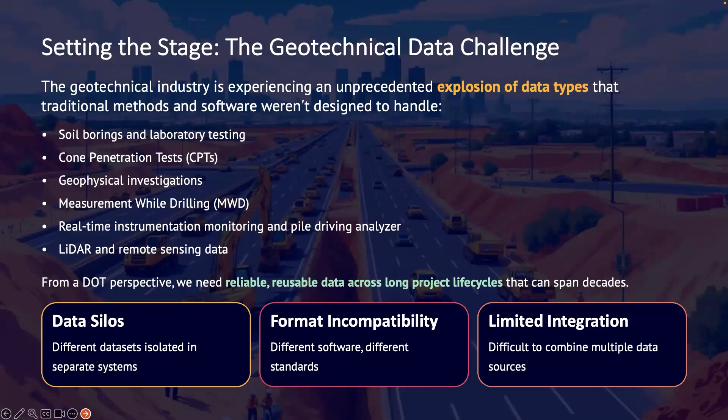As we've seen, integrating diverse geotechnical data is a major challenge for geotechnical engineers. One big reason is we've seen a rapid shift in our software landscape recently in terms of data management. For years, our industry relied on gINT as the dominant standard for geotechnical boring data management and reporting.

However, as we all know at this point, there's a planned sunsetting of the gINT software. So we've entered a transition period of uncertainty, and really a need to adapt quickly to decide where we're all going to go as geotechnical engineers.

Today we're in a multi-vendor ecosystem where several strong alternatives have emerged, each with their own unique strengths and weaknesses. Some challenges associated with this paradigm shift are: staff are going to need to retrain to use new tools, new workflows may need to be created from scratch for these new platforms, and data will be exposed to possible errors due to

increased data migration and conversion efforts to get things from an old system to a new system. Users are going to need to be sure they're adopting data management standards to make sure they don't start or bring over old bad habits, and that their data remain reliable and usable across multiple systems.

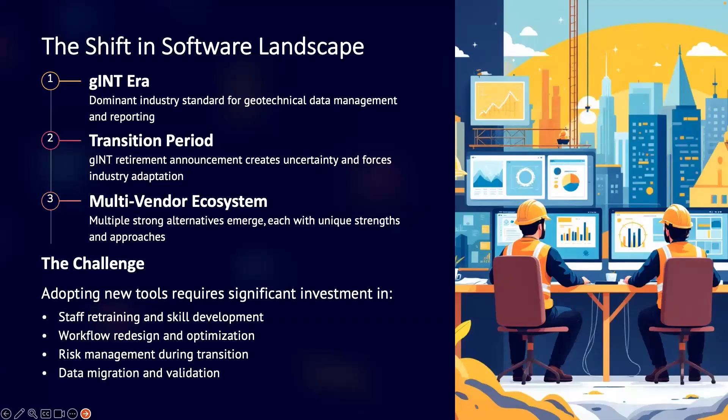As we try to navigate this shift in the data landscape, one of the risks we need to be aware of is a heavy reliance upon any single software solution. This is just my personal opinion, but we want to make sure we don't get locked onto a single vendor. One reason for this is the life cycle of our geotechnical data assets versus our software.

If you consider the life of a bridge or a pavement structure versus that of a piece of software, we can pretty quickly see that our software solutions can turn over several times over the life of a structure. Another reason is to minimize disruptions amongst our consultants.

As a state agency, if we can avoid forcing any of our consultants to use one specific piece of software, we prefer to do that. We also think it's advantageous to create modular systems where specialty vendors can create tools to access and analyze data without having to develop the data storage and data management system itself.

The bottom line here is that we want our data to be standardized so that it can outlast the software we're using. To protect our investments and ensure continuity, we need to develop strategies that keep geotechnical data accessible and resilient no matter how the technology evolves.

Ultimately, that's the backbone of what we're trying to build here, something that can consume standardized data. We're trying to standardize the data on the back end so that we can develop tools like we're going to present, to consume the data on the front end.

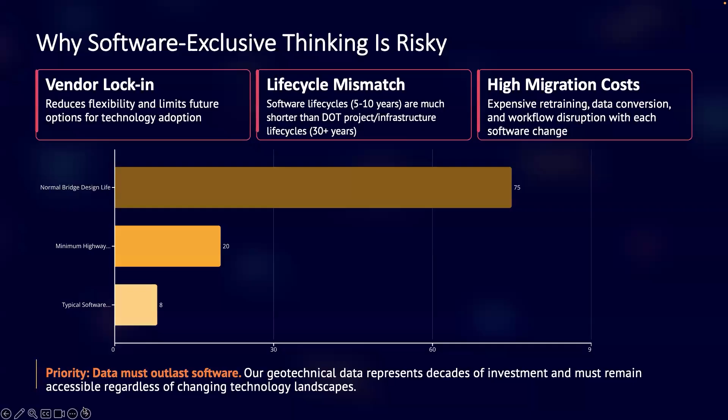So just like Jesse mentioned, recognizing all those risks of software dependency and the importance of long-term data accessibility, Louisiana DOTD has adopted a proactive data-first strategy. This focuses on workflows over tools and stays software-friendly rather than software-dependent. All of this starts with a strong data standards and quality requirements, so the data remains consistent no matter what tools are used.

For example, about a decade ago, Louisiana DOTD with LTRC standardized both digital data in gINT and PDF boring log reports, which made it very easy for all consultants to deliver data in a consistent format. Building on that foundation, Louisiana DOTD has also been working to standardize database schemas using a centralized database for storing and managing soil borings, lab testing results, CPT soundings, and deep foundation datasets.

Currently, we are also collaborating to develop standardized workflows that work smoothly across a multi-platform ecosystem using APIs to integrate with any modern database. This approach gives Louisiana DOTD the flexibility to adopt emerging technologies and develop purpose-built features as needs evolve without disrupting existing workflows. This inclusive approach ensures tools can connect to a centralized database and contribute specialized functionality and evolve independently while keeping operations running smoothly. Ultimately, this strategy protects DOTD's data investment, streamlines operations, and ensures long-term adaptability, so the data collected today will continue to deliver value well into the future.

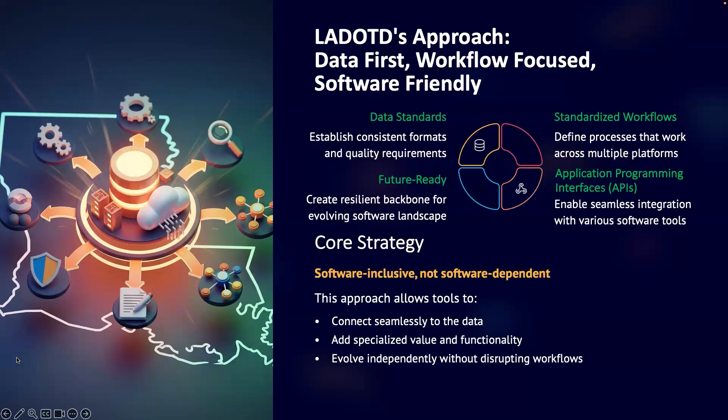Building on that data-first strategy, in the past few years we've been working on research projects with LTRC and Louisiana DOTD to develop a web-based platform to support engineering analysis that meets the latest design specifications from Federal Highway and AASHTO. Because it's built on standardized formats and APIs, it can easily handle thousands of soil borings, CPT soundings, and deep foundation datasets, making huge geotech datasets actually very usable.

With just a web browser, engineers can search, visualize, and analyze all these datasets consistently and quickly. Through API connections, including a direct connection to Open Ground Cloud, this platform plugs into any modern geotechnical database system without forcing you to switch tools. What's important here is that we're building every feature from the ground up to align with Louisiana DOTD's specific workflows and requirements. This approach lets engineering teams work faster, take advantage of new tools as they come out, and keep their data valuable long term, regardless of what happens with software vendors down the road.

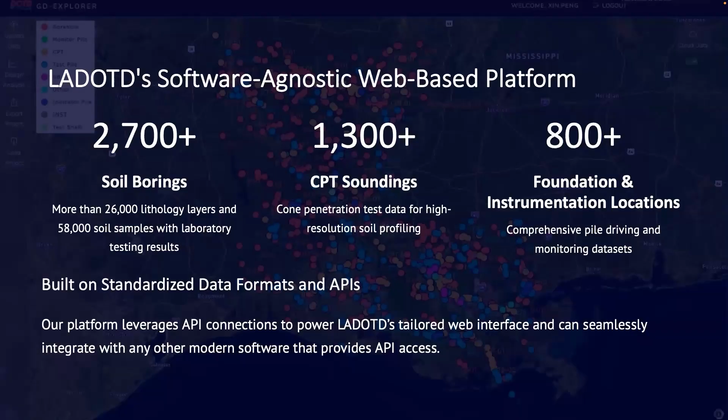Next, I'm going to show a short demo video to showcase how to load large amounts of geotechnical data into this tailored web-based platform developed for Louisiana DOTD for quick analysis across multiple projects.

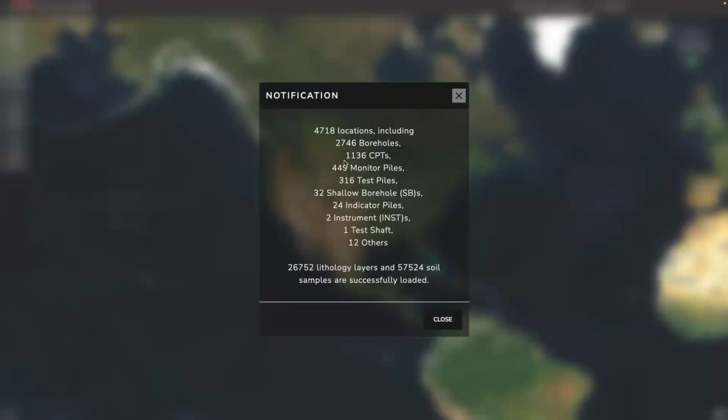By simply clicking a toggle switch at the top right of the screen, the platform connects directly to the Open Ground Cloud database and automatically retrieves all the necessary data for design analysis. In this example, we loaded data from over 4,000 locations, including soil borings, CPTs, test and monitor piles, and instrumentations, along with more than 26,000 lithology layers and 57,000 lab testing result samples from different DOTDs, all within just a few minutes.

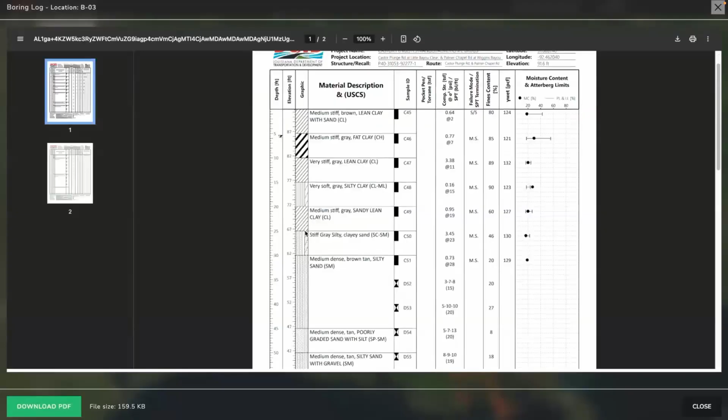With another button click, all the locations are displayed in an interactive map, allowing engineers to quickly navigate across the entire Louisiana for data interpretation and visualization. Engineers can quickly click on any boring location, which brings up the corresponding PDF logs, generated dynamically in seconds. Here, we manage all the digital data, not just PDF logs, which means we not only can view the PDF logs, we can also perform advanced data analytics and interactive visualization for any projects across the entire state.

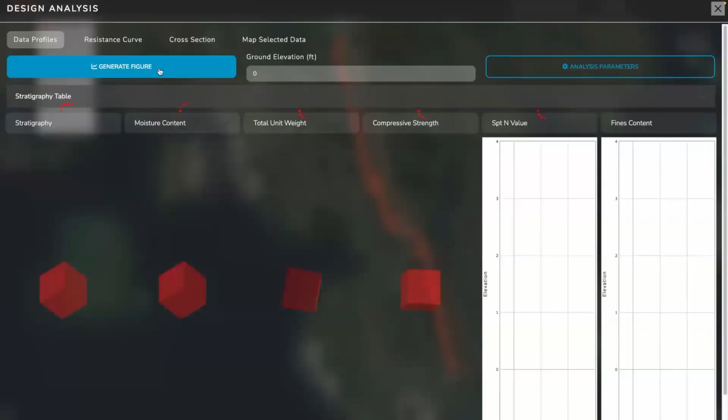For example, we can instantly navigate to the LA1 project, which we will talk more about in a few minutes, in Southeast Louisiana. Here we can quickly select over 100 soil borings, deep soil borings, and instantly generate soil profiles with statistics following the latest AASHTO and FHWA design specifications. We can also quickly and interactively generate color-coded 2D cross-section views for detailed subsurface visualization.

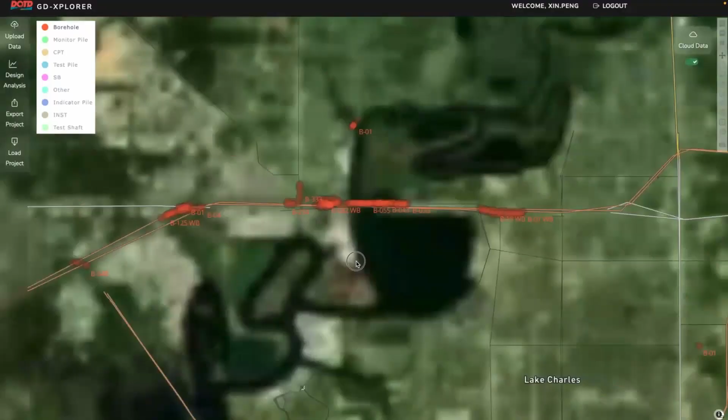If we want to shift to another location within the entire state, we can quickly navigate, for example, to Western Louisiana. Here we can select all the soil borings from another highway crossing over a river and quickly visualize the entire cross-section within seconds. In this cross-section, we see some color-coded soil lithology layers.

Here, the black colors represent organic clays, green shades represent lean, fat, or silty clays, yellow shades represent sand materials, and red shades represent silty materials. We can clearly and instantly see the subsurface variabilities within this 2D cross-section view, and everything can be visualized within seconds.

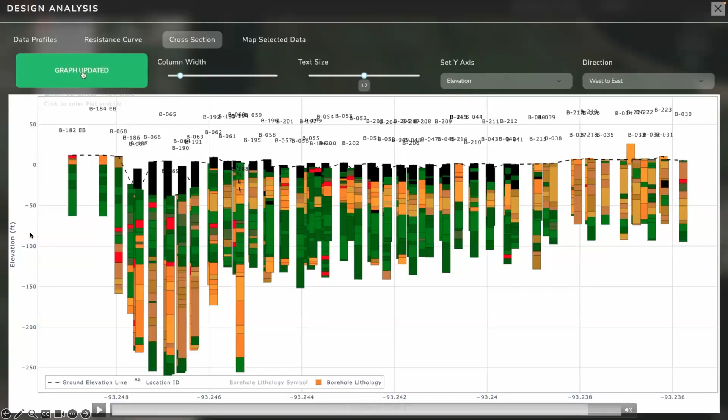So this platform we have been working with Louisiana DOTD and LTRC is transforming how geotechnical data is managed and used across Louisiana. Engineers now can access a statewide searchable database for all geotechnical investigations from all the DOT projects, making it very easy to find and reuse valuable data collected over the years.

Beyond what we covered today, as I mentioned previously, the platform also includes some advanced design and visualization tools that let users explore and identify stratigraphy and perform advanced engineering design analysis. All these tools are fully aligned with AASHTO and Louisiana DOTD standards, ensuring seamless compliance in design workflows.

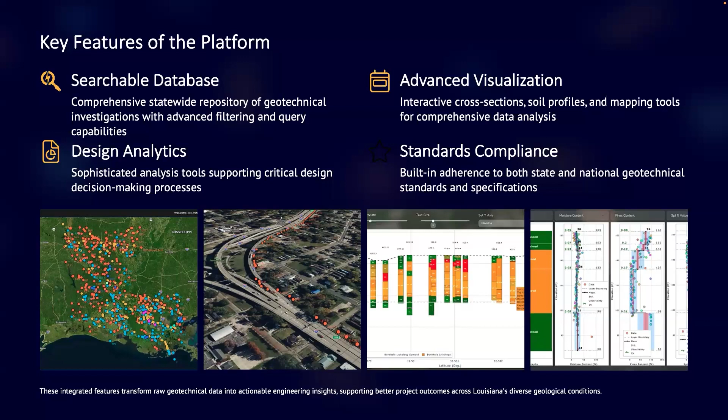Most importantly, the platform also enables data reuse across projects, so the effort invested in one project helps build a stronger foundation for future work statewide. By integrating all these capabilities, Louisiana DOTD is ensuring that its geotechnical data stays accessible, actionable, and valuable, improving efficiency and decision-making across all future projects.

Okay, so over the next few slides I want to talk a little bit about a project we're using as the case study to develop additional features for the platform. We didn't spend a lot of time getting into all the statistical analysis—that would be a whole other presentation—but we're trying to take this forward into the construction realm, and this is a great project to use as a platform for that.

So this is the LA1 relocated project. It's located in Lafourche Parish in coastal Louisiana. It's been in progress for about two decades. Right when I graduated from college, they threw me on an airboat to get samples for this project, and I've been working on it ever since.

It's a prime example of a data-intensive project with pretty complex geotechnical challenges. Some of the data we've acquired over the course of the project includes over 500 CPT soundings, nearly 200 soil borings, 25 pile load tests, over 3 years of embankment monitoring data, and dynamic monitoring and drive data for well over 1,000 pile bents. Phase 1 of the project was designed and constructed using a non-managed data approach.

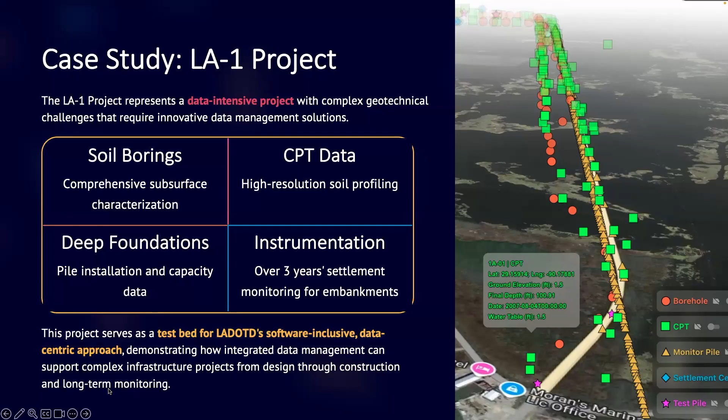That was done about 15 years ago, if not longer. Then between phases 1 and 2, LADOTD completed some initiatives along with LTRC that allowed us to begin managing our geotechnical data. So phase 2 of the LA1 project is currently under construction, and we now have a really nice set of managed data that's allowing us to prototype the tools we want to demonstrate here.

Overall, phases 1 and 2 of this project are comprised of about 20 miles of elevated highway between Golden Meadow to the north and Port Fourchon to the south. The highway supports 16% of the nation's domestic crude oil production, about 20% of the nation's seafood production, and also serves as a hurricane evacuation route.

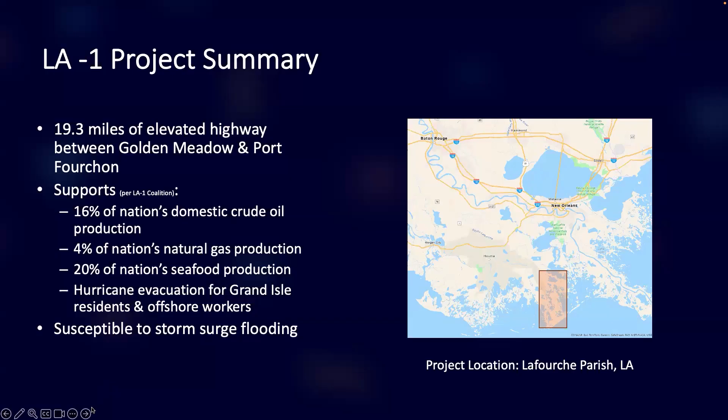The original at-grade highway was susceptible to storm surge flooding, so we decided to elevate the entire route until it reached the protection levee at Golden Meadow, so it could actually serve those purposes again.

As I mentioned, phase 1 of the project was completed using conventional design and inspection, and we didn't have a centralized way to manage our geotech data. Just for background, we began the geotechnical design in 2003 and did some pre-construction load testing in 2004.

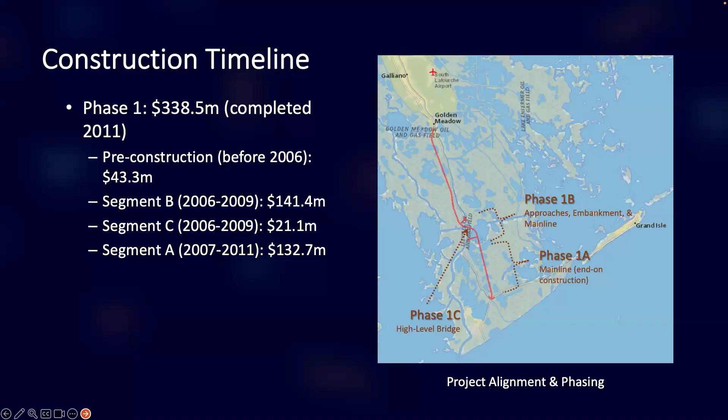We constructed phase 1, segment B, which consisted of embankments and connector ramps between 2006 and 2009. We simultaneously constructed phase 1, segment C, which was a high-level bridge over Bayou Lafourche. Then about halfway through phase 1B, we began construction on phase 1A, which was an end-on construction of elevated highway beginning at the southern end of the project.

A little bit later, in 2018, we began construction on phase 2E, which was a slight modification to the north connector. It basically widened the road there, making the turn easier, and gave us a little bit of extra room to begin phase 2. Finally, in 2022, we began construction on phase 2, segments A through D, which are again mostly end-on construction that resembles phase 1A, but with larger piles and higher loads.

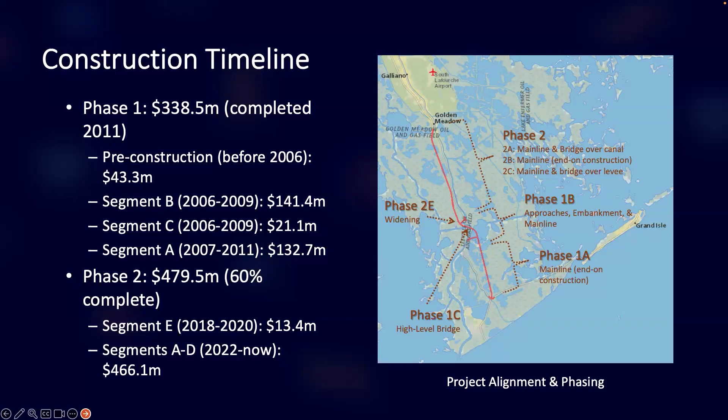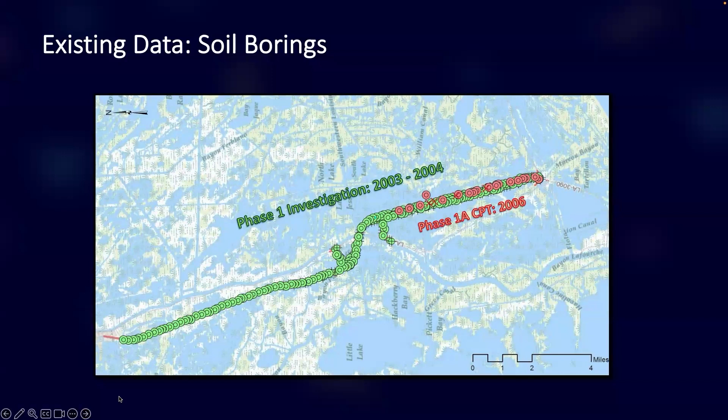The green dots show our original geotechnical investigation that we made between 2003 and 2004. And right before phase 1A was constructed, we got a few additional CPT soundings to accommodate a slight alignment shift for the phase 1A project.

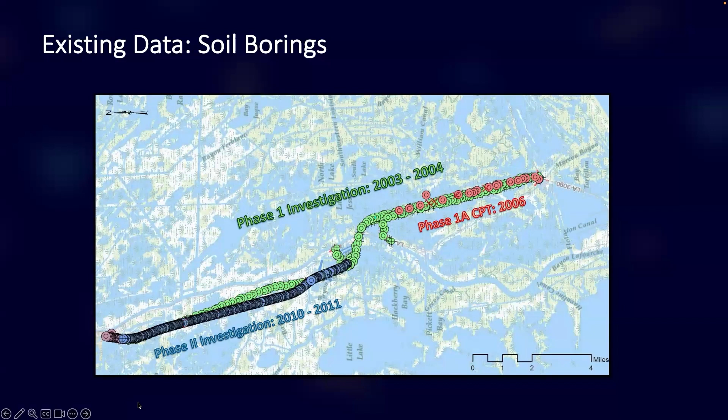And then sometime later, you can see from the blue line back towards the north, on the left side of the screen, the phase 2 alignment shifted back to the west. So basically we had to redo our boring program for phase 2, and it's also much denser than the original phase 1 layout. This was done to try to place one CPT or one boring at each substructure approximately.

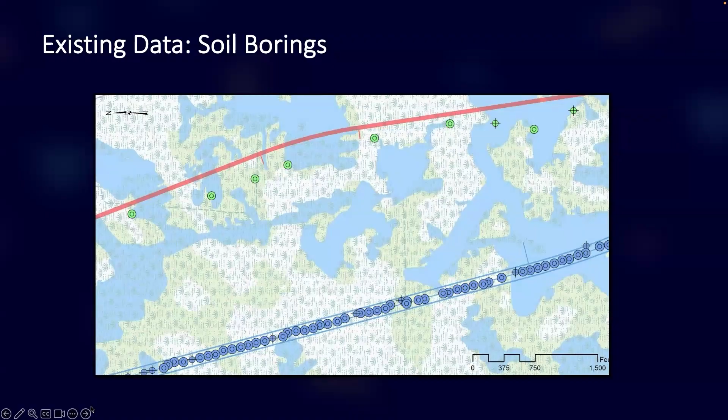So here you can see a zoomed in view of the original and final phase 2 alignments, which kind of shows that updated boring spacing that we used on phase 2. It's a lot denser, and we have a lot more data to go along with.

So here's something that I think is a really good example that kind of compares how we used to do things in the past versus how we're able to tackle those same things today.

Some of the things that Xing was showing before, he was generating these types of profiles in just seconds. But this is a subsurface stratigraphy based on the CPTs that we made along phase 2, so it was 360 some odd CPTs. Due to the density of the data used in these soil behavior type classifications, each one of these pages took me about a day to generate in gINT back in 2011.

And the tools we're building today can basically generate these types of plots in just seconds.

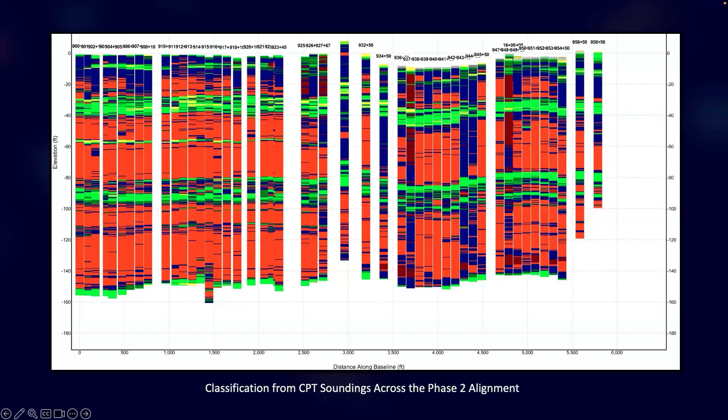So this platform's capabilities allow us to do things like identify lateral changes in layer thicknesses, detect anomalies, and trace specific strata along the entire project alignment.

And so now I'll leave it to Xing again to demonstrate how this platform enables the user to do these kinds of things. And as we go through the rest of the slides, keep in mind that the soil boring, CPT, and test pile data are all stored in our OpenGround database.

So we're basically trying to illustrate the fact that we can build these tools that pull data out of our existing databases and do what we want, and basically leave our data alone. As Xing said, we don't interrupt our workflows. We're building this prototype to do all the other advanced analytics and presentation work.

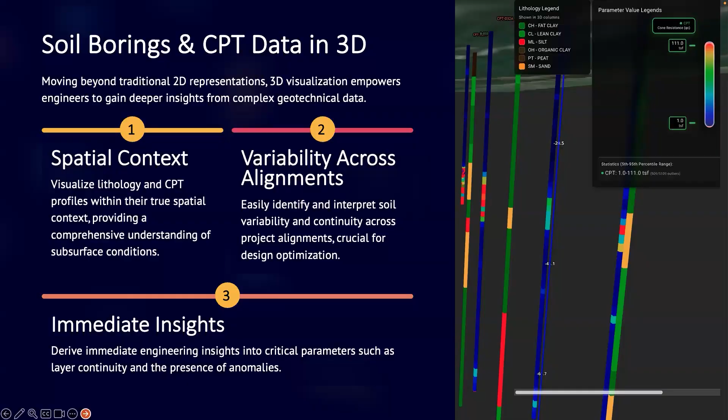Thank you, Jesse. So next, I will demonstrate a few example videos just to showcase our 3D BIM prototype platform we have been working on recently, as part of the bigger ecosystem to support the deep foundation design and construction.

So in this example, we selected about 77 deep soil borings and over 100 deep CPTs to visualize in this 3D BIM environment. At the top of the screen, you can see all the IDs from the selected soil borings and CPTs. The left side of the view displays a 3D control toolbox. The right-hand side view shows a color legend that dynamically updates based on the specific data sets we are analyzing in this 3D view.

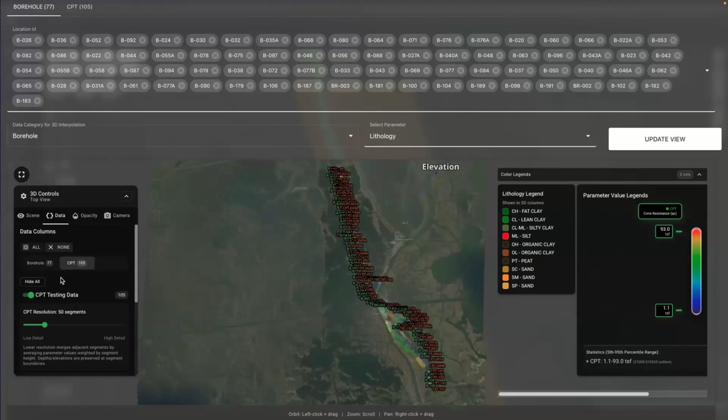So first, let's hide the CPT locations, about 100 CPTs, and then focus on the deep soil borings. We can quickly rotate the plan view into a 3D view to interactively manipulate the data sets.

So here we see color-coded lithology layers for all 77 deep soil borings. Again, the black or dark brown shades represent organic clays, and green shades represent lean fat or silt clays, and yellow shades represent sand materials, and the red color represents silt materials.

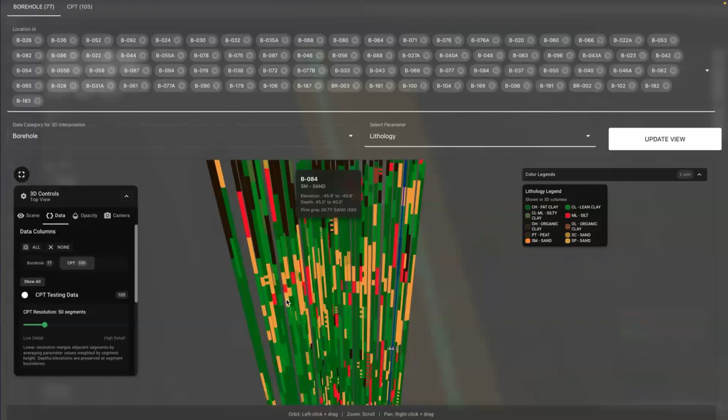So the user can hover over any lithology layer in the 3D environment to check the top and bottom elevations of each lithology layer, and also check the detailed soil lithology descriptions within seconds.

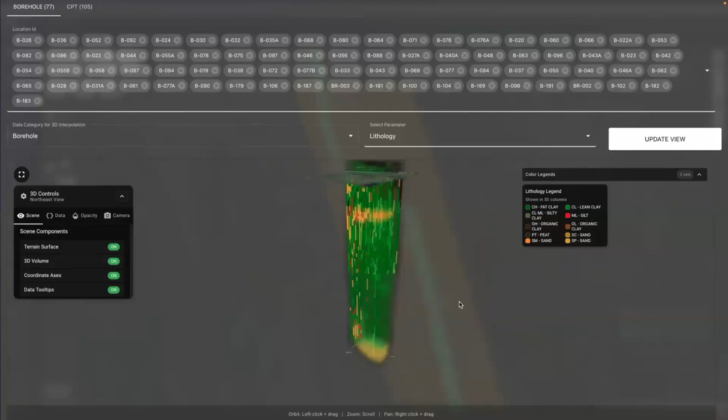Additionally, based on the soil borings selected from this map, the platform can dynamically interpolate the soil lithology layers from nearby soil borings to create a continuous 3D lithology volume, further supporting the evaluation of subsurface conditions. In this example, we can clearly see two major sand layers that could potentially impact the drivability of the piles.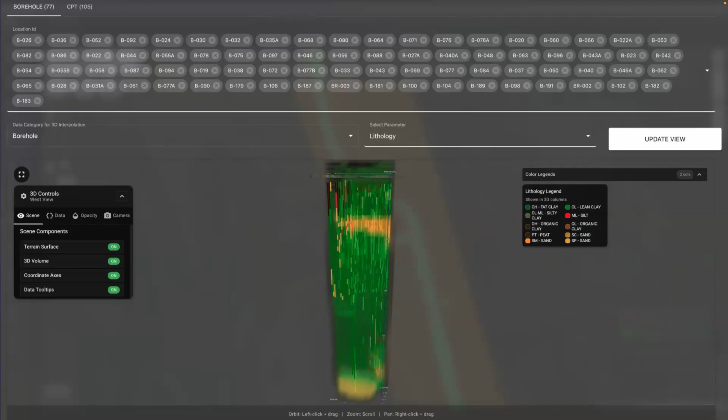The first major sand layer is at an elevation of about minus 30 feet to minus 50 feet, with a trend of decreasing thickness from north to south, or right to left in this view. Another sand layer is located below about elevation minus 200 feet.

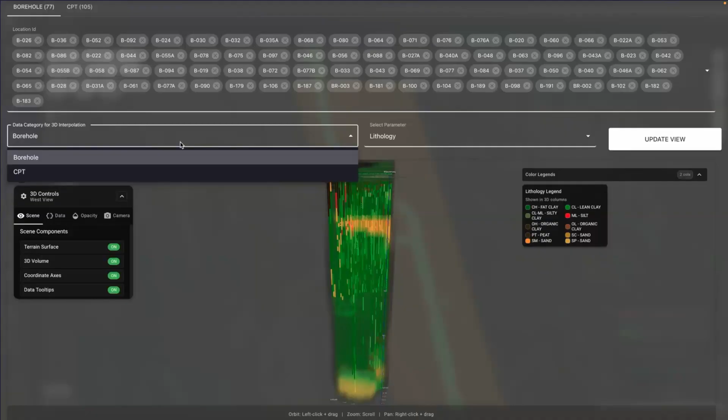In this 3D environment, we can perform dynamic 3D interpolation not only for soil boring data, but also for CPT data and deep foundation datasets. So even for soil borings, we can dynamically interpolate not just the lithology layer as you see here, but also perform interpolations for any soil properties from all the lab testing samples.

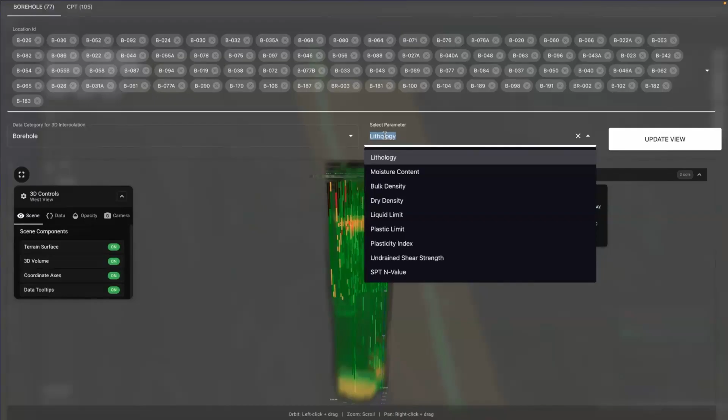For example, we can dynamically interpolate the moisture content from all the soil samples within these deep soil borings. In this view, the warmer colors represent high moisture content, and the colder colors represent low moisture content.

As we can see, there are some high moisture content values, over 80%, at very shallow depths, which is kind of consistent with the shallow organic materials we observed previously in the 3D lithology profile. We also see some low moisture content values, around 20%, at very deep depths.

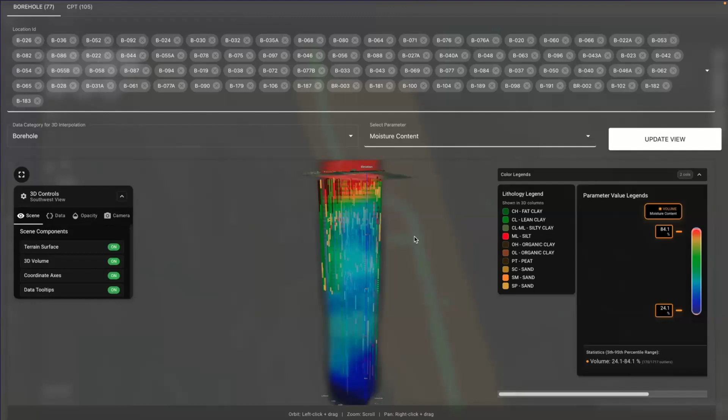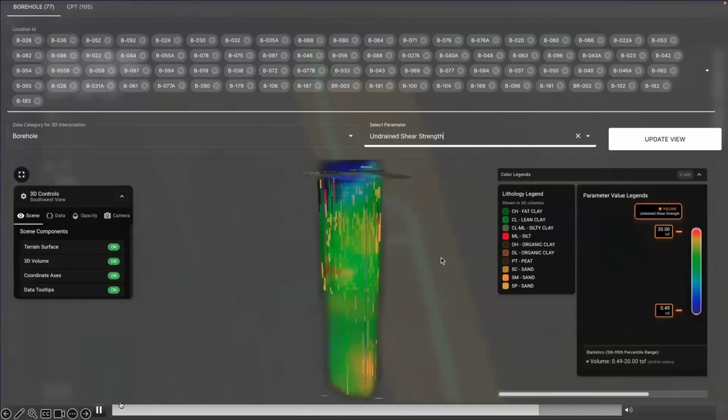Similarly, we can quickly change to other properties like bulk density or undrained shear strength. This allows us to provide a very comprehensive analysis, giving a more accurate and detailed understanding of the subsurface conditions and variabilities, ultimately leading to better informed design and construction decisions.

In addition to the soil boring data, we can also seamlessly integrate the CPT data into this 3D environment along with the soil boring data within seconds.

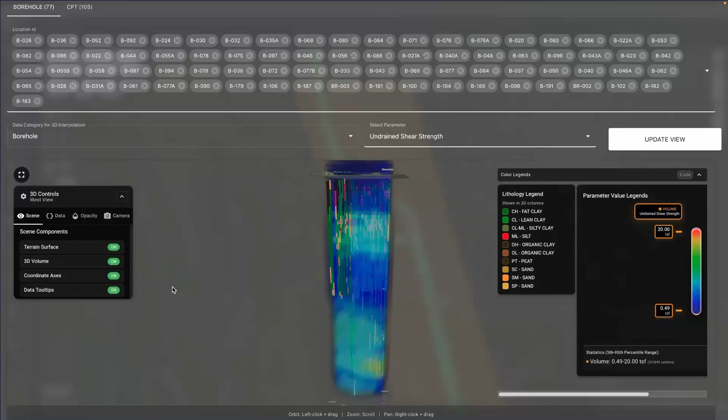Here we can bring up those 100-plus CPTs in this 3D environment to further enhance our confidence in understanding the subsurface conditions.

In this view, we display the color-coded lithology layers from the soil borings, and also color-coded cone tip resistance from all those CPTs.

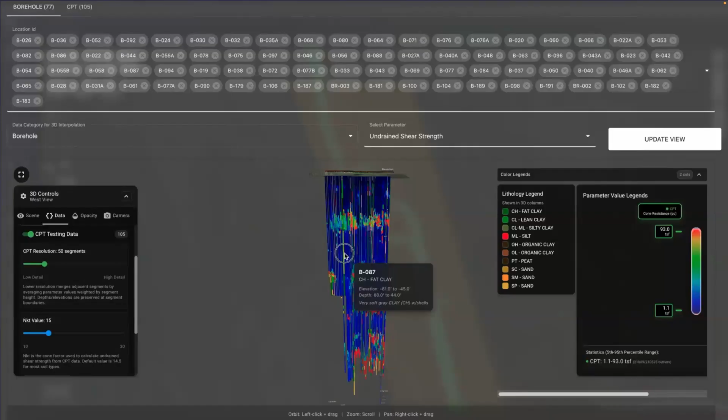Warmer colors represent high cone tip resistance, and cold colors represent comparatively low cone tip resistance. Here we can easily identify the elevations with high cone tip resistance and how they align with the sand materials observed in the soil lithology columns from the soil borings.

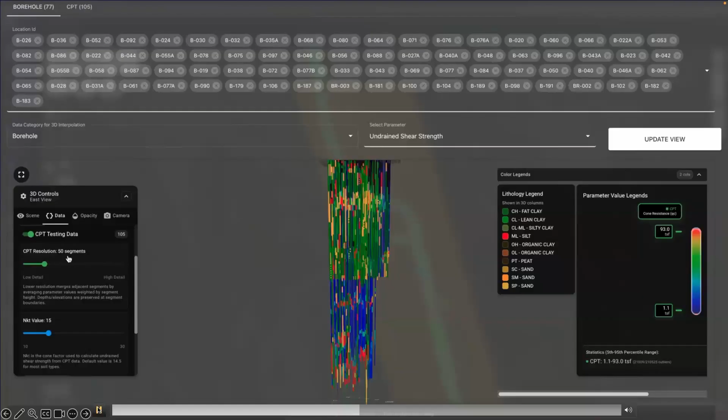In addition, we can also dynamically change the CPT columns to color code with any other CPT parameters for 3D visualization, for more comprehensive evaluation.

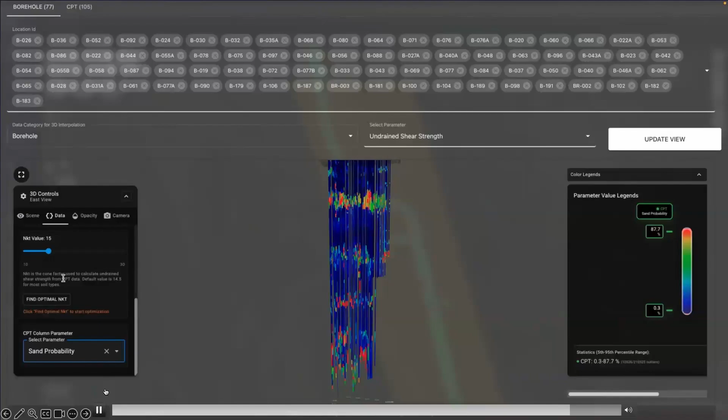In addition to just visualizing boring and CPT data, we also wanted this platform to help us make construction-related decisions in real time.

It was important to develop features where we could access test pile data, as well as construction observations such as pile driving logs, and basically create a feedback loop where the designer can use field observations to confirm design assumptions and improve future design decisions.

This project is so big that we didn't issue all the pile order lengths in one go. We're having to stay ahead of construction, but we frequently reissue new pile order lengths as construction progresses, trying to feed field observations back into the engineering side to make sure we're making good decisions.

So the big takeaway here is that our goal was to include both geotechnical data from borings and CPTs, as well as construction data, in the same 3D space, and to present that data in an intuitive way for faster decision making.

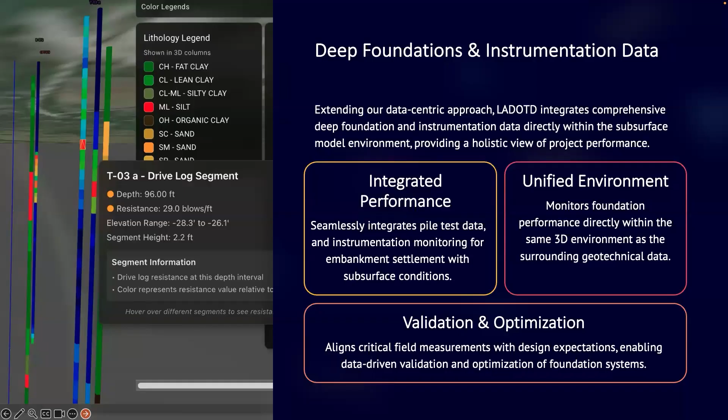Since 2004, we've installed and tested 25 test piles at various locations along the LA1 alignment. We worked with the Open Ground developers originally when we adopted the software to modify our database so it could accommodate our existing pile load test database alongside our soil boring and CPT data. This includes data such as pile restrikes, elapsed time, PDA and CAPWAP resistances, load test data, load versus deflection data from static load tests, pile dimensions, pile locations, pile elevations, and even what hammer was used to drive each pile. This means the tools we're developing via the Open Ground API also have access to our load test data.

Additionally, for the LA1 project, we required that all pile driving logs be typed into a spreadsheet and submitted along with the handwritten logs. As we've standardized that input form, we now have an easy way to integrate our pile driving information into this prototype as well.

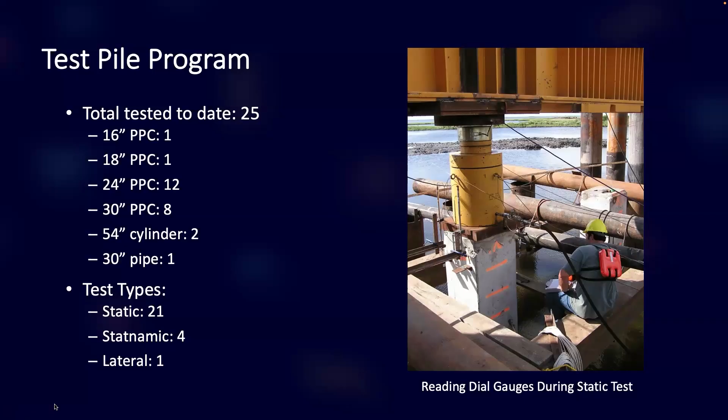In terms of design, there are a lot of challenges on this project that necessitate rapid access to field and design data so we can review and accept piles in a timely manner. The project is end-on construction, so if we slow down the pile driving operation at the front of the train, we slow down the entire project. As design engineers, we need to be able to synthesize the data coming out quickly and make quick decisions.

Secondly, the geotechnical conditions themselves are quite difficult. This site consists primarily of normally consolidated clay with some intermittent sand layers, as you saw in that previous video demo. The clays have relatively low shear strength, so if we hang the piles up a few feet too high, they're not going to get capacity in side friction alone.

And we risk missing our target resistance. However, because there's a specialized structural design on the piles, we're limited as to how much pile we can actually cut off. So at many bents, the design loads have us tipping piles just barely into a sand layer that becomes very dense very quickly, which presents a refusal situation with just a few feet of penetration into the layer. In other words, we need to hit the sand to get our required resistance, but we can't drive very far into it. This gives us a very narrow window to set our pile tips.

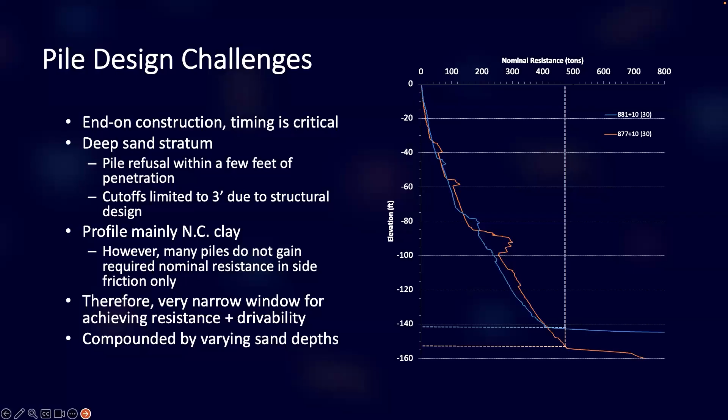Before getting to the challenges and case study, I'm going to showcase how the managed pile driving data can be quickly accessed, visualized, and analyzed within these environments. Previously we showed video demos of integrating CPT data and soil boring data. As Jesse mentioned, DOTD and LTRC has spent a lot of effort over the past 1 or 2 decades to standardize and develop database schemas in their centralized database.

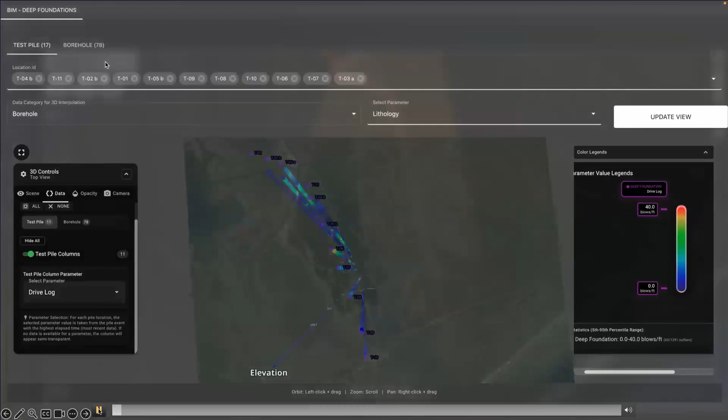In this video, we select about 10 test piles and can quickly rotate the plan view into the 3D view to interactively manipulate the test pile data.

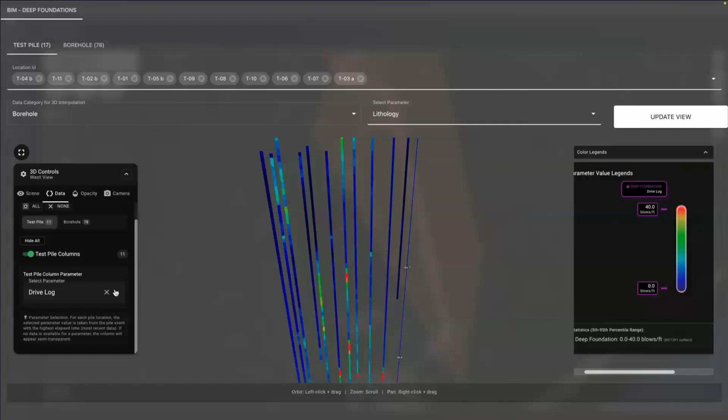Here we're showing color-coded pile driving blow counts from the drive logs for all these test piles. Warmer colors represent high blow counts, and cold colors indicate low blow counts.

In addition to showing trends for blow counts, engineers can also visualize any other test pile data within this 3D environment using the drop-down selector from the toolbox at the left-hand side.

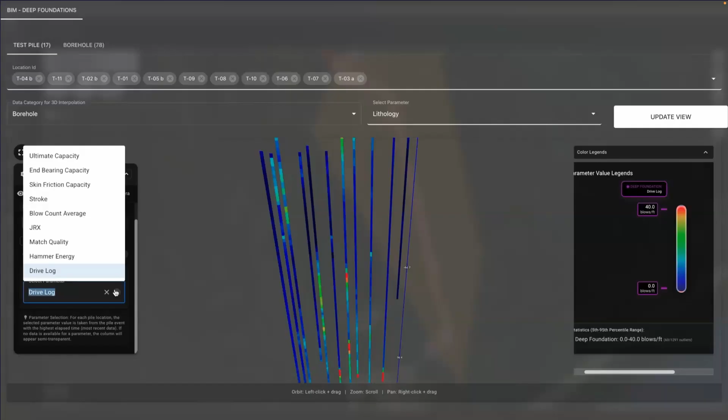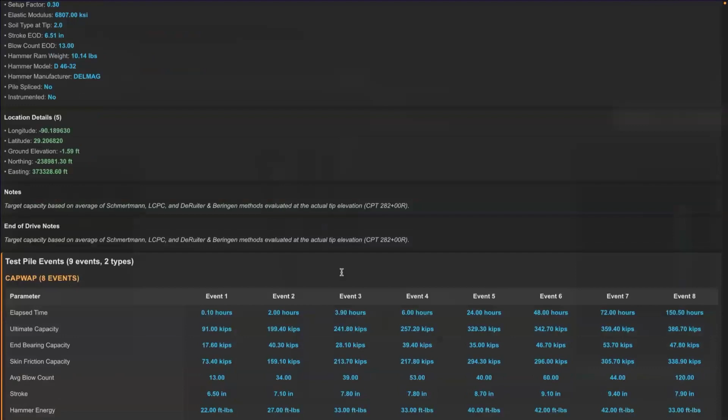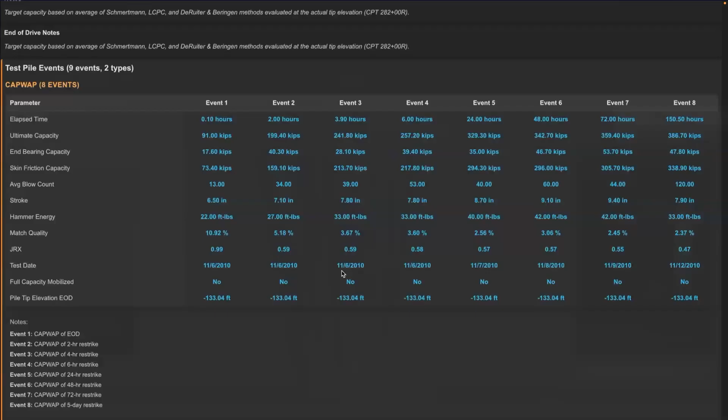Additionally, users can simply click any of these 3D test pile columns to check all detailed information relevant to that test pile, including detailed pile configuration such as design load, pile length, hammer type, hammer weight, and the performance from all different test pile events, including pile setup interpretation from both dynamic and static tests. This specific pile has 8 dynamic or CAPWAP events and 1 static test pile event.

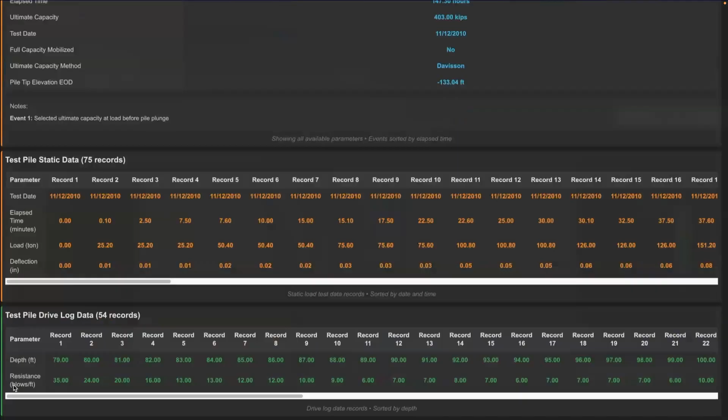Engineers can also plot and analyze all this load deflection data or pile setup curves using interactive charts. Users can access all this information within the 3D environment for any test pile within seconds.

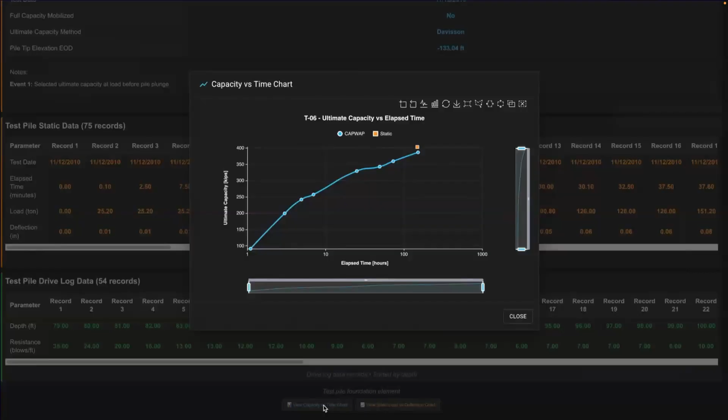Following up on what Jesse just mentioned, in the next example I'm going to demonstrate how the platform helps the project team identify and evaluate data inconsistencies that contributed to construction challenges within a specific pile driving section.

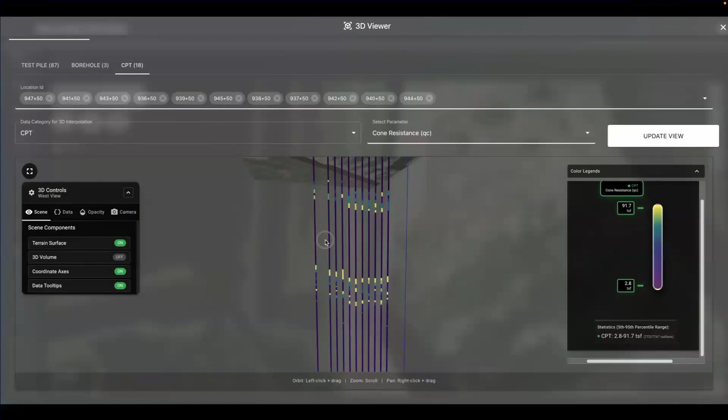In this example, we selected about 11 CPT soundings covering a section that includes 15 bridge bents with about 88 piles. These CPT columns are color-coded by cone tip resistance, with purple indicating low resistance and yellow indicating high cone tip resistance.

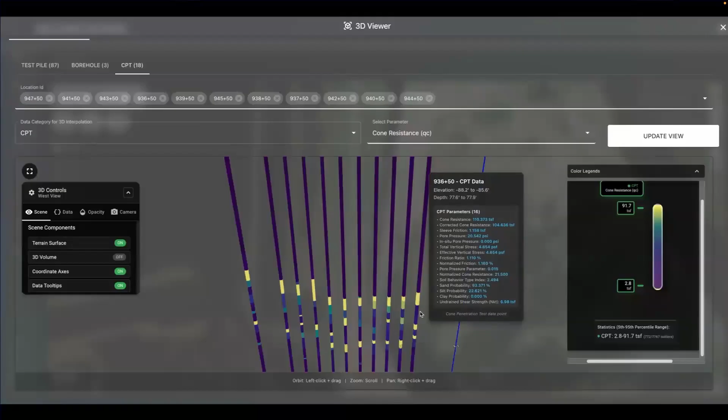Within this 3D environment, the platform can dynamically interpolate the CPT data into a continuous 3D volume, similar to what we previously saw for soil lithology layers from soil borings. Because CPT has much higher data density than soil borings, this shows the platform's capability to quickly interpolate large amounts of data in a very efficient manner.

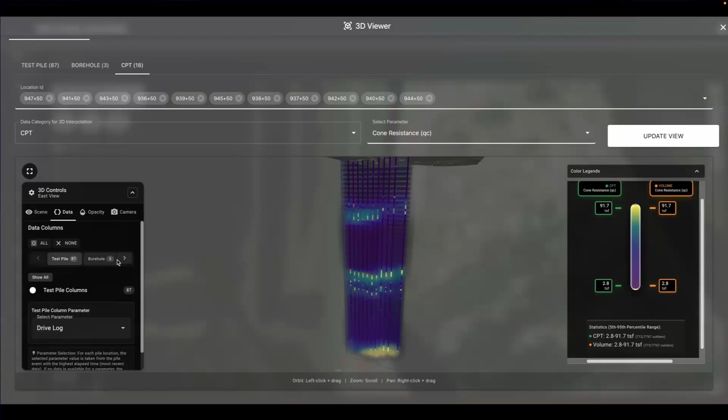This 3D visualization shows consistent patterns between the interpolated 3D volume and the individual CPT columns, providing a clear, continuous view of subsurface variability across the entire section.

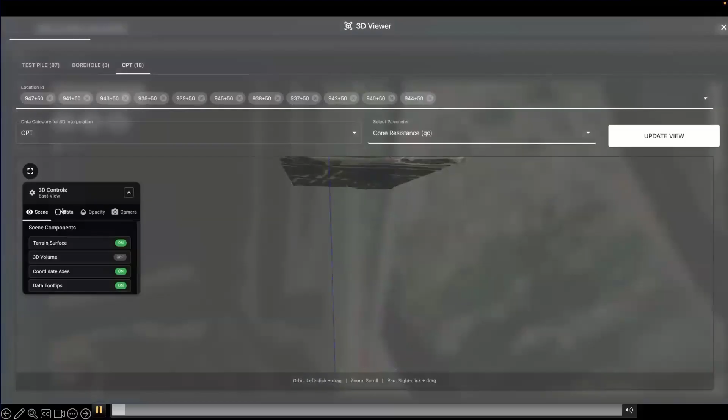Next, let's hide the CPT data first and then visualize the pile columns within the same area.

In this view, we have the color-coded pile driving blow counts for all 87 piles across those 11 bents. Warmer color represents high blow counts, and cooler color indicates low blow counts.

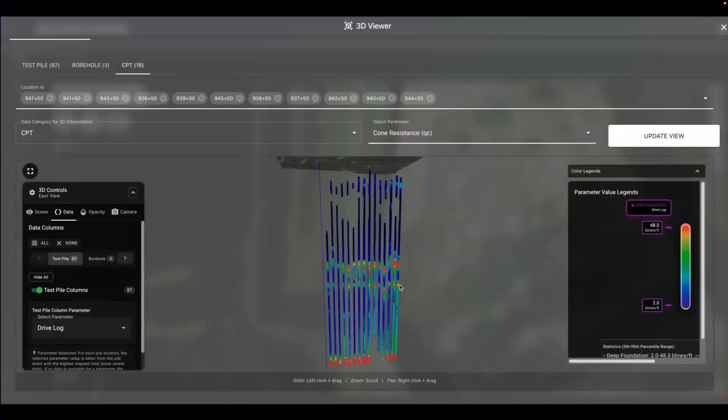As we can see here, and as Jesse mentioned, we have a very challenging subsurface condition here. We saw some localized zones showing 0 blow counts above elevation minus 60 feet. We also see some hotspots of high blow counts between elevation minus 80 to minus 100 feet, along with consistently high blow counts at very deep levels around 140 and 143 feet.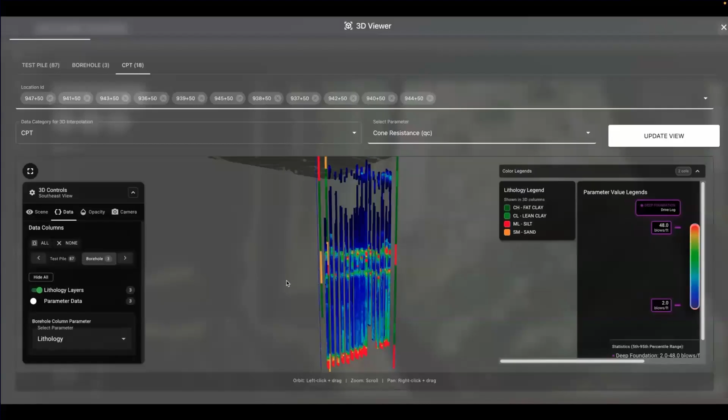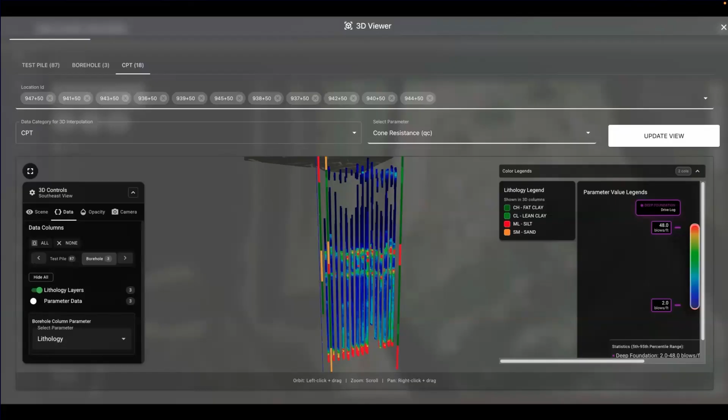To validate these observations from the pile driving blow counts, we can also incorporate nearby soil boring data into this 3D model. In this section, 3 soil borings are available: 1 at the north end (right-hand side) and 2 at the south end (left-hand side) of the pile group. These 3D lithology columns, with silt layers shown in red and sand layers shown in yellow, display good consistency with the elevation ranges for the high blow count zones from the color-coded pile columns.

Since CPT data are available across the entire section, as we saw from the previous videos, and as Jesse mentioned, the project team used the CPT soundings as the basis for pile design. Now let's introduce the interpolated 3D volumes to directly compare with the pile driving datasets in this example.

On the north side or the right-hand side, areas with high cone resistance showing in yellow align well with the high blow count zone showing in red from the pile driving logs, indicating good agreement between the data used from the geotechnical site investigation and the pile driving performance data.

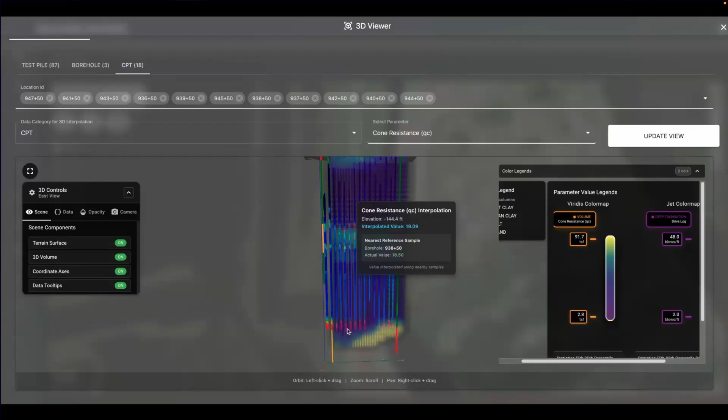However, moving from the center area toward the south or left-hand side, we start to see some discrepancies. The high blow count zones, particularly at deeper elevations, occurred within purple regions representing low cone-tip resistance. We also see the high cone-tip resistance layers from the CPT data located about 5 to 10 feet lower than the high blow count elevations.

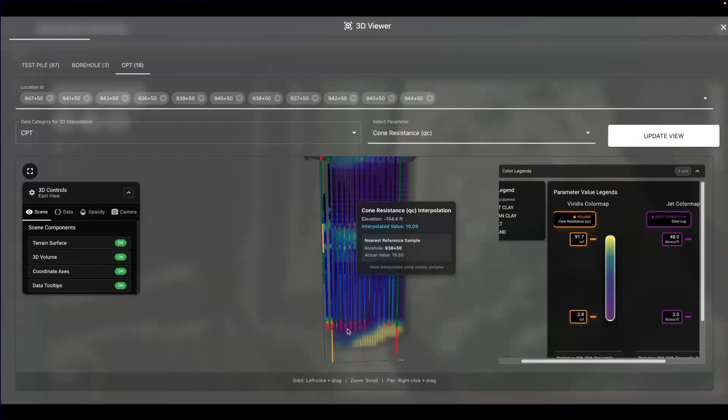Because the original pile design relied on the CPT datasets, this mismatch led to challenges during the pile installation process, especially early refusal and the need for pile cutoff before reaching the high resistance layers indicated by the CPT profiles.

Once the inconsistency was identified during construction, the project team conducted a detailed review and determined the top elevations from several CPTs in the southern regions were likely reported incorrectly by the contractor. The team then corrected all those elevations, updated the affected CPTs, and reloaded the revised data into these 3D environments.

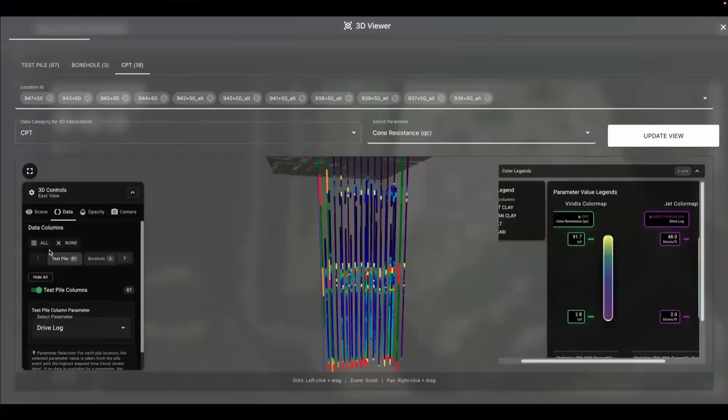After interpolating the correct CPT data, the updated 3D visualization now shows much better alignment between the CPT soundings, pile driving blow counts, and the soil boring datasets.

As this example illustrates, by integrating multiple geotechnical and construction datasets into a single 3D BIM environment, engineers can visually detect inconsistencies, validate subsurface interpretations, and make informed, data-driven decisions. This integrated approach enhances the reliability of deep foundation design and helps reduce construction risks by identifying potential issues in the design and planning stages or early construction stages.

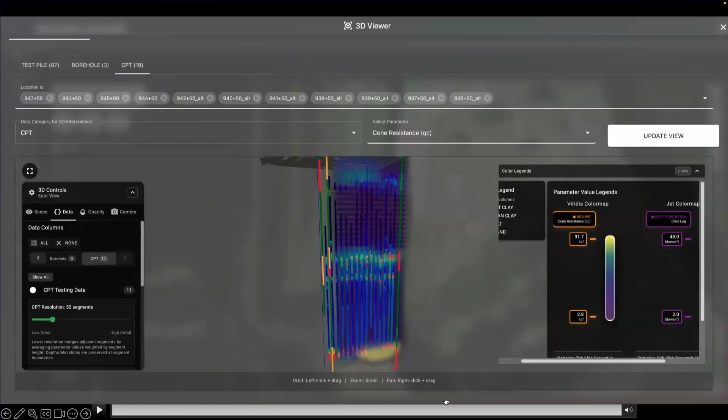Although we are still in the midst of building this platform and kicking ideas around, I think we can pretty easily demonstrate some immediate benefits associated with managing our data and developing a 3D BIM type environment for this case study. One of the benefits we see is just faster insights.

The data interpretation becomes quicker and more confident by eliminating paper documents and scattered charts and a federated system, because the system already knows where to find and what to do with things like elevations, tip resistances, pile driving resistances, and other properties. We don't have to create new spreadsheets from scratch every time we want to compare data from different sources like construction and design.

Another benefit here is clearer communication, which makes the subsurface conditions easier to understand. We believe this could hold great value for other stakeholders, such as bridge designers and contractors, who may be more willing to either collaborate or sign off on different changes if they're provided a better understanding of the relationships between our foundation performance and our geotechnical conditions.

Finally, we think we can make smarter decisions by linking geotech data with construction observations. That's always been true, but having it in a system like this makes it all so much faster and integrated. This even extends to the QA of our data, which was demonstrated on the previous slides. So what had actually happened here was...

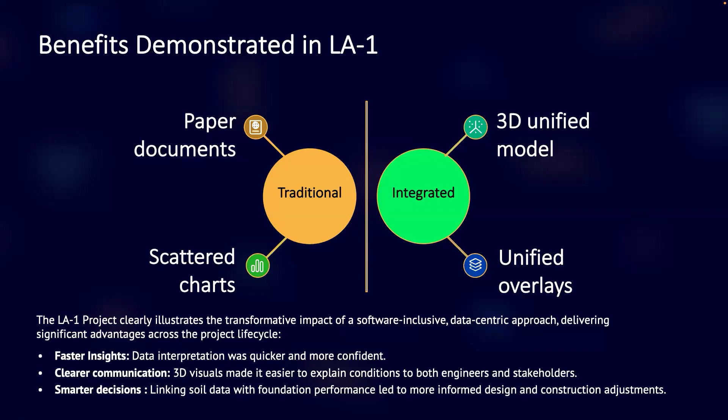Before we wrap up, I want to briefly mention some ideas we're kicking around for future development. Most of the LA1 project consists of spliced pre-stressed concrete piles, and due to concerns about stresses as well as achieving pile resistance, we've elected to perform dynamic monitoring on one pile per bent, which works out to something like 20% testing.

Although our OpenGround database doesn't yet handle PDA data at this time, we've discussed ways to upload and plot tabular PDA data within this system. Similar to how we're using pile driving blow counts, we think plotting things like stresses, pile damage, hammer energy, and hammer efficiency in the same system could be very valuable for troubleshooting.

Imagine a project where piles start hitting refusal blow counts inexplicably. If we have PDA in this type of system, the engineer could very quickly evaluate things like hammer energy and stroke right alongside all the boring data to decide whether all the driving observations are making sense.

Although we briefly touched on the fact that we can pull our pile restrike data from the database now, we think by separating the analysis tool from the storage database, we can build even more ambitious workflows to evaluate our data. For example, if we can pull pile resistance versus time elapsed since driving, which Shane very briefly showed, a pile setup curve that was pulled directly out of our database.

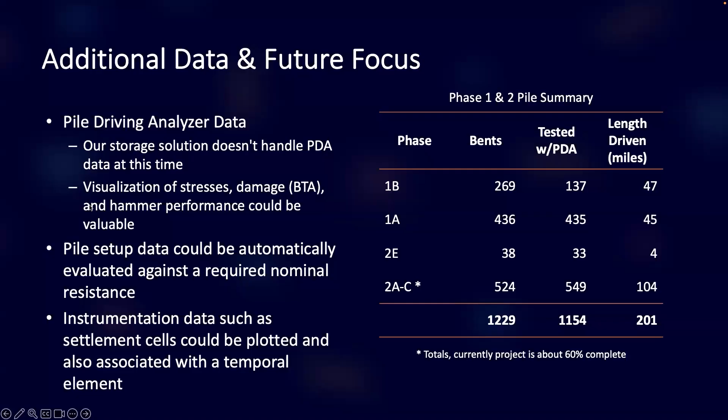So, like Jesse said, we hope today's presentation encouraged you to think about how geotechnical data integrates into your workflows. Like Jesse mentioned, the database management and how you bring the value from all those database management efforts into your real products.

That could be smart collaboration efforts between different teams. And the real opportunity lies in treating your data as more than just files in folders - it needs to be organized information that actually flows through the organization for the products.

So when DOTD takes this approach, the benefits are engineers spend less time hunting for information and more time doing the actual engineering work. And project teams can compare options with real confidence, and the knowledge in your organization becomes easy to find instead of trapped in someone's filing cabinets.

And what we are talking about isn't about finding the perfect software today. It's about building the foundation that lets you take advantage of all the data management efforts you've been working on in the past years with the new tools we're developing right now and in the future.